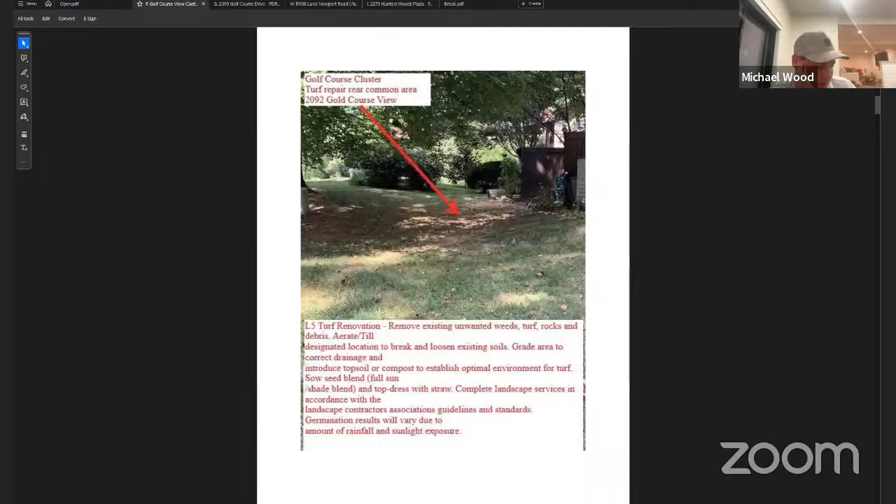Does anybody want to make a motion? I'll make a motion. I'd like to make a motion to dismiss this issue due to a lack of jurisdiction on the DRB's part. The landowner appears to have resolved the maintenance covenant violation by taking a course of action, an option provided by the covenants administration, restoring the site back to existing conditions rather than altering existing conditions. Therefore, that is not in the purview of the DRB.

There's a motion. Second. Brian with the second. Any further discussion on that? All right, all those in favor of the motion, say aye. Aye. Aye. Any against? Any abstentions? All right, motion passes 6-0.

All right, next appeal. Application G is the appellant here. Cam, welcome back.

Yes, on behalf of the Reston Association Board of Directors, we are appealing the prior decision that is on page 3 of the application. The panel on 611 disapproved the regrading in locations as indicated on submitted site plans, as it was not in the purview of the DRB, and requested RA staff to explore whether the project requires DRB approval or not. To my knowledge, and based on the indication on page, I believe it is page 29 of the application, and the drawing that was provided by the applicant, there are 2 specific elements that have been requested or currently exist. One would be the exposed downspout that goes to the edge of the property that expels onto the sidewalk cluster common area.

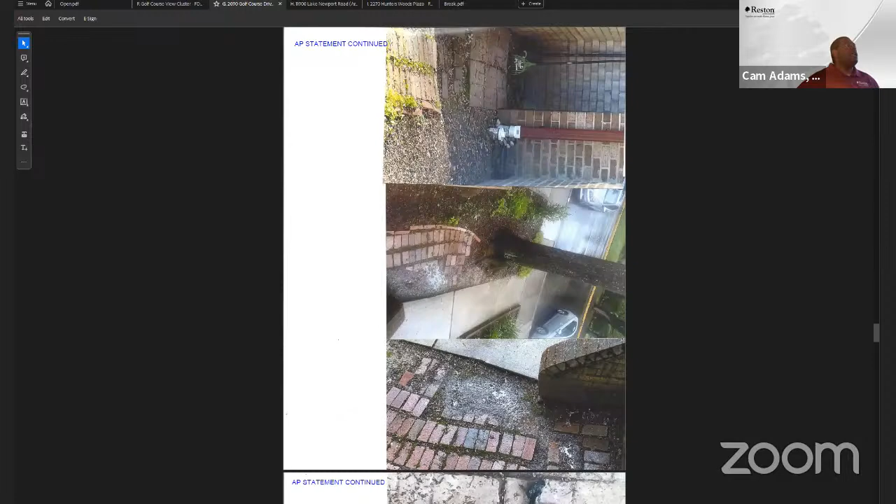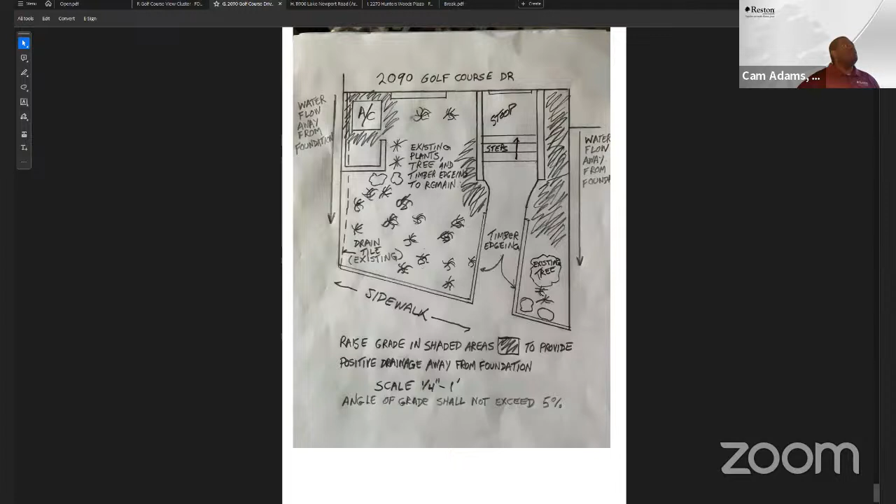If we could go to page 29 in the application, you can see it on the left-hand side facing 2088, I believe. It expels - it says drain tile existing. There is actually a downspout, corrugated extension from the property owner's gutter downspout, that extends to the sidewalk, as well as, if you could see, there are certain aspects of this that require or is being proposed to have stone installed to help with the regrading that has been suggested to address the foundation issues that the property owner is experiencing. And so those 2 elements are subject to the design review board's purview in terms of exterior modifications. So the Reston Association would request that the DRB accept the appeal.

Okay. Any questions for the appellant?

All right. So once again, John and I were on this panel, and we kind of made a similar decision as the previous application due to us feeling that there wasn't anything else. I was unaware that there was that - I mean it's labeled as existing, but basically I didn't know that was the pipe on the left was part of the complaint and the violation. So to me, that is new information, just for the record - we did not know about that. We were focused so fully on the right-hand side of the property, I didn't even know there was other stuff going on, to be honest.

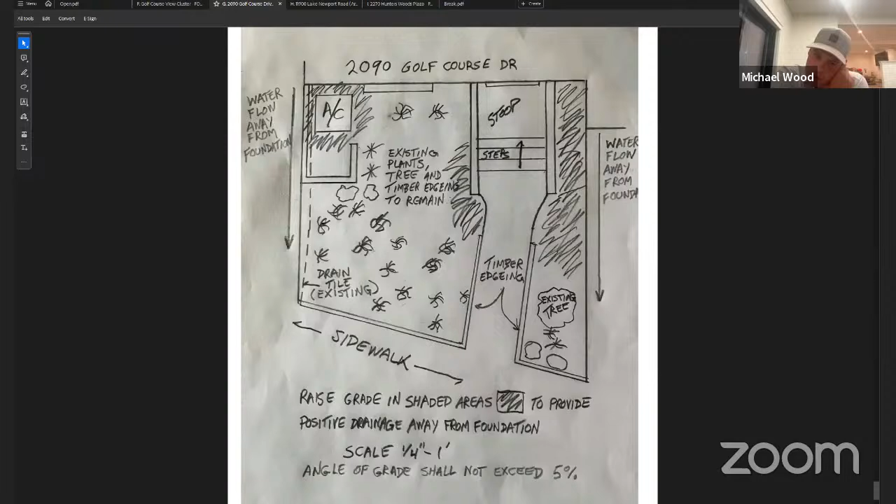Staff, do you have that picture of the black downspout on the left-hand side? That's the back one - you'd have to come out and take pictures now since the monkey grass has been added. And someone did come out and they said, oh yeah, this looks much better. I was like, yeah, thanks.

Sometimes with downspouts we allow short extensions that can be covered by vegetation, but if it's a long extension - I think the picture I saw showed it directing water right onto the sidewalk out front, not your sidewalk but the actual front sidewalk, which our guidelines don't allow. So staff, do we have that picture you showed us?

I can cut it shorter, that's not a problem, but then it is going to impact my other neighbor, Kirk, because of the way the land slopes downward, and I don't want to ruin his azaleas. That doesn't seem very kind.

And actually, I do find it interesting that the complaint is only against me. Yet if you walk the neighborhood, most neighbors have that. So that does make it a bit tricky.

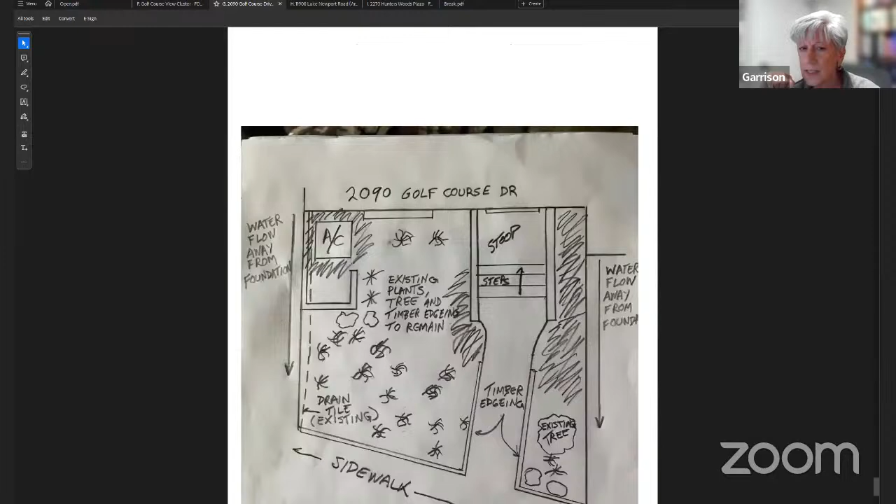Is there a reason that I'm missing that you can't disperse that water in your lot that's coming off that existing drain tile? Right now, I'm looking at page 29 of 29, staff. And it just seems that draining water onto a sidewalk is going to cause a problem, especially during the winter when it can get icy.

In all honesty, it's never been an issue because I'm also pretty particular about shoveling, and working in cardiology is just the way I work. But I've never had an issue with it. Really for me, this is about the right side where there is no piping at all.

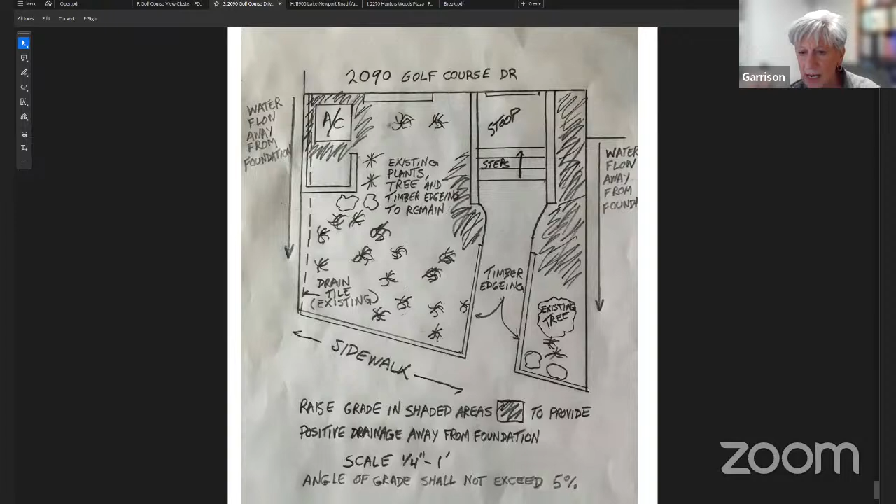Understood. So my question on the right side is what kind of stone - okay, now I'm going to ask Mike B to pop in because he's our PE - but stone is not impervious and it doesn't run things off. What it does is, depending on the size and grade of stone you're using, it just lets the water drop down to where the grade is faster.

So that's not going to help runoff. It's not really raising existing grade. Water takes the quickest route with gravity, and the joints between stones are the quickest route down.

In all honesty, we hadn't finalized a set type of stone. I want to be totally transparent, so nothing had been finalized as to a specific type of stone. And right now, there's not currently a water issue in that back corner. It's strictly an aesthetic issue, right?

It's an aesthetic issue, and there is a water issue. So at the end of the steps, behind the tree, it pools right there. Sorry that you guys don't have the picture I submitted to Barbara, but that shows there's a gap for the grading, and so it pools there. And that actually does freeze in wintertime because there's about that much of a difference. So trying to kind of clear that up so it's a bit better.

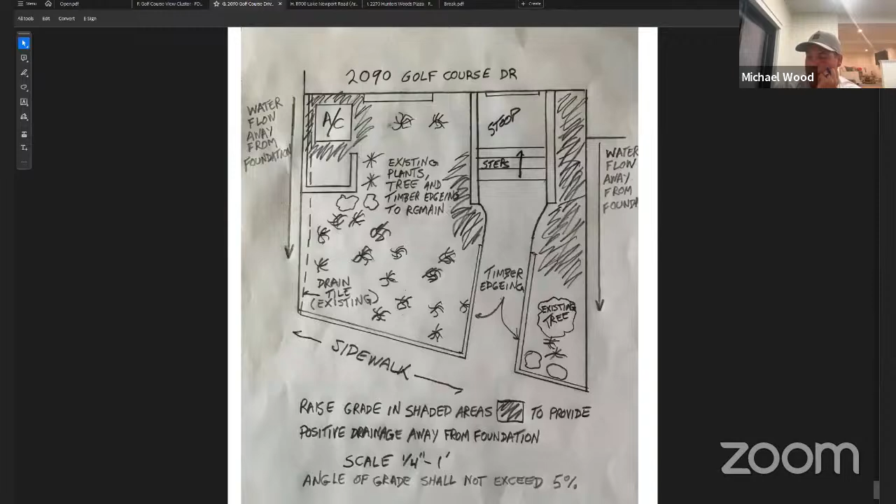So I want to pull out that brick and add some dirt and help make it look a little bit more attractive, because that's where it pools during the hard rains and stuff like that.

Absolutely. So without doing anything else and topping it with a stone material, Elena's absolutely right - it's just going to allow the water to run through it and it will go where it's going to go. So some manner of collection system would be prudent to collect it and get it somewhere else, if you don't want it to just pool there. It'll pool there until it overtops your sidewalk and runs where it's going to run.

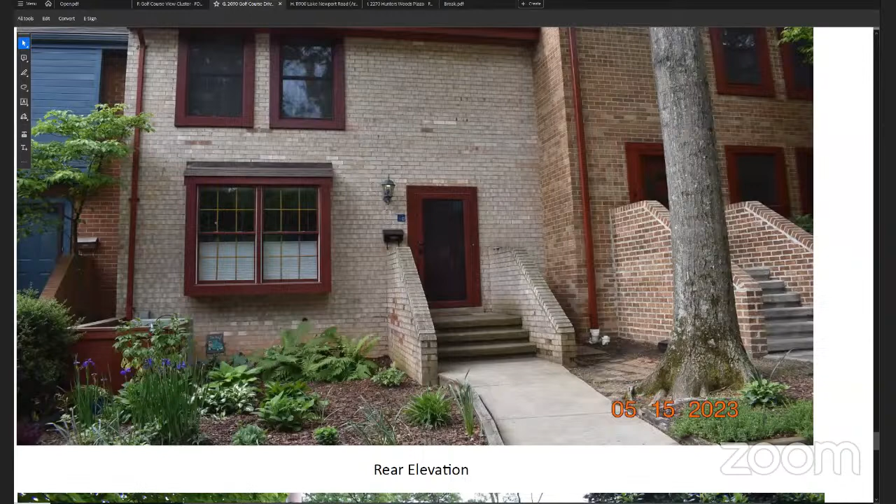Yeah, go ahead, Elena. No, I'm sorry, I was suggesting a yard drain or something like that, but I'm sure you're getting there. Yeah, I mean, similar to the French drain you had installed to combat the foundation water - just something to collect it and a pipe to effectively move it someplace else to allow it to dissipate rather than sit against your existing infrastructure there.

So that's the critical bit. To me, if she likes plants, I would even find a water-loving, shade-loving plant - put a bunch of ferns there. That is actually getting attractive plants that will thrive in that kind of space, because I like lots of plants.

That's gonna look... I know people like riverjack stone, but the reason riverjack stone is there is usually it's covering a pipe, or covering a dry well, or covering something that's actually collecting the water below and conveying it away. It's the filter media for the water to run through to that other collection system, right?

Correct. So that's one reason why we're bringing this up. So aesthetically, it definitely looks better than the brick, but it's just not necessarily going to fix any of your issues if you just put a layer of stone down, is basically what we're saying.

So, I guess the question for me is, does it need DRB approval if I'm trying to do something on the right side - that's what I'm talking about.

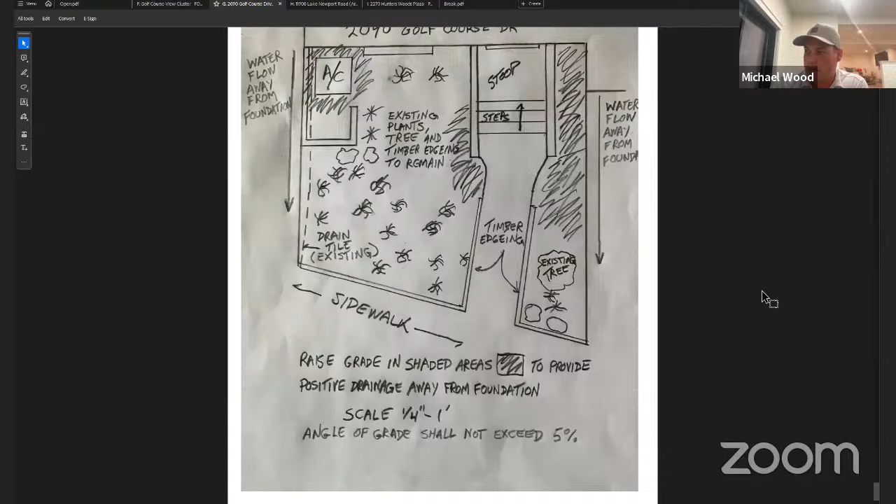So what I am thinking, and I'm not making a motion yet, but what I'm thinking is maybe, if we request just basically updating the plan that she already submitted - that drawing on page 29 - that basically clarifies a little bit better exactly if she does want to propose stone. I think it is a good option.

I just think it needs to have an actual point to it. So, it's gonna have a pipe that maybe goes under your sidewalk and then has a pop-up emitter in the middle of all those nice plants there and gives them water - just as a thought, could be an idea.

There could be a way to just maybe plant that right side and just maybe put some stone in the back corner.

So I think you guys need more information. I'm thinking that we just need a little bit more information and a little bit better existing information, and you may show us that the drain tiles have been adequately covered - she says send us updated pictures, and that might be adequate.

But I would say if it's still going directly on the sidewalk, our guidelines do not like that, because, worst case, even if you're out there shoveling, whatever, there's small water drips that just come through there over time. That thing probably isn't even really draining that well if it's horizontal.

It actually is short of the sidewalk, so it actually falls into the thing. And so you might have a better way to show us the existing situation a little better. Okay, sure, that's fine.

That makes sense - what I would say is I'm going to make a motion to defer the application to allow the applicant to submit updated information on some of the existing drain tile on the left side, as well as provide an updated material or plant matter or plan of action on the right-hand side that is clear to us as a board, with more information.

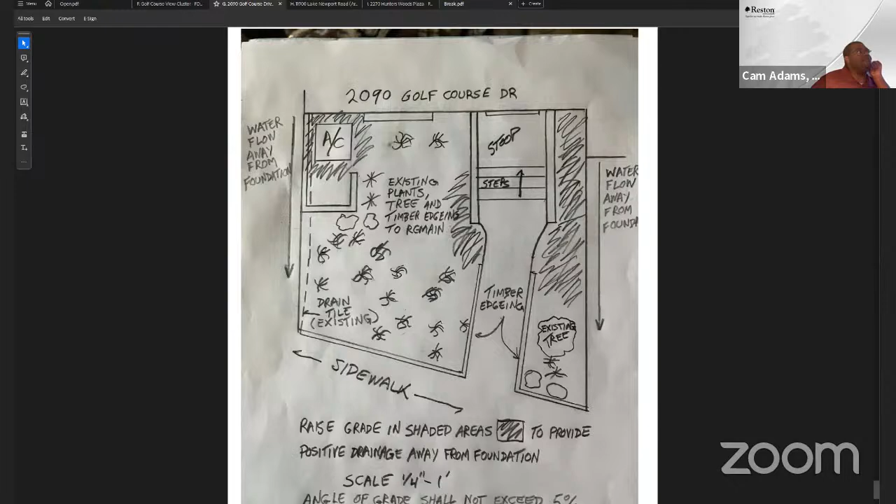Say 60 days to submit. Not a problem. Are you okay with that, Brian? Yes. Seconded? Yes. All right, is everyone else who voted okay with that? Say aye. Aye. Any against? All right, timeline of 60 days added.

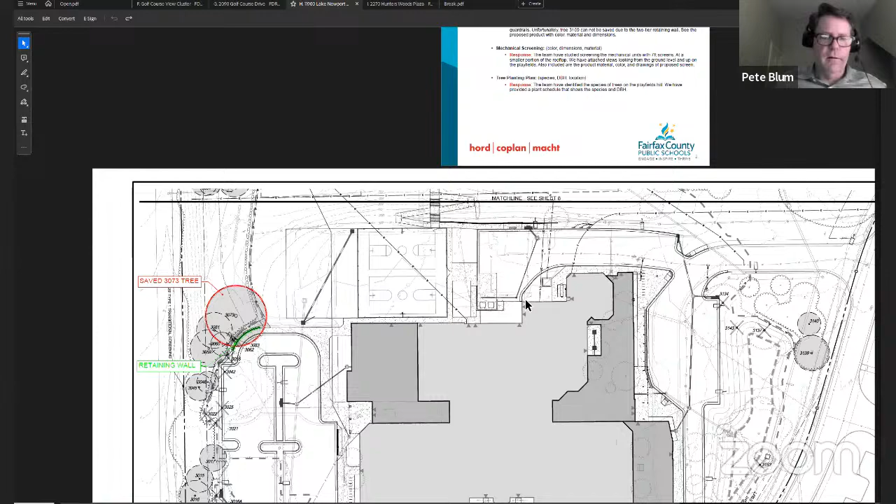Okay, you could pause right there. The tree in the upper left-hand corner of the sheet, as before, we're able to keep, by virtue of a small retaining wall that's under 2 feet. Previously, we had thought we could save both trees 3170 and 3169. We had been asked to look at saving tree 3170, and it turns out we could not get a small enough retaining wall that would work for that. Our retaining wall was going to be too high. So if you go to the next slide, please.

So what we're proposing adjacent to the children's play area, or the outdoor classroom, is that we'll still be able to save tree number 3170, the specimen tree people have asked us to save. But we'll have to do it by splitting the retaining wall into 2 steps. By doing that, we're not able to save the smaller tree, which had kind of been a bonus. For the 2 steps, we're proposing to use this block wall system. It's curved, a semicircular curved wall. We're proposing to make it out of Nicolock, which is a brand name, but it basically looks like stone. It lays up a little bit like block. The color we're proposing is York brown.

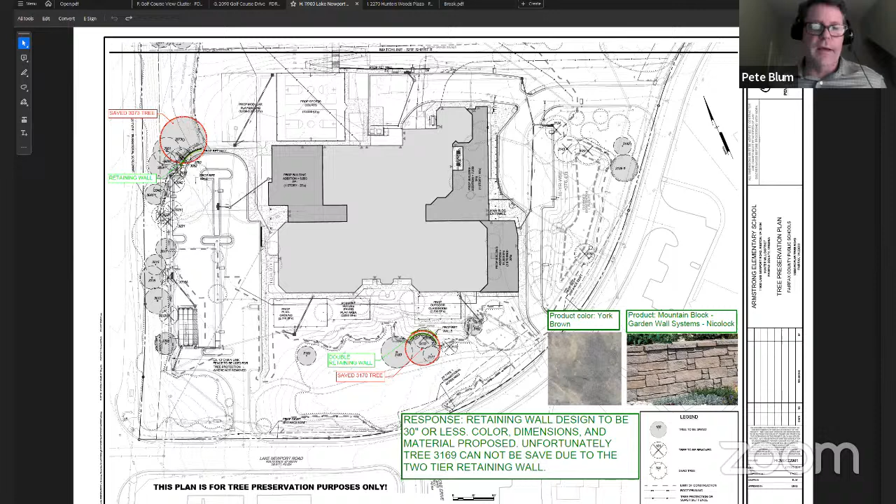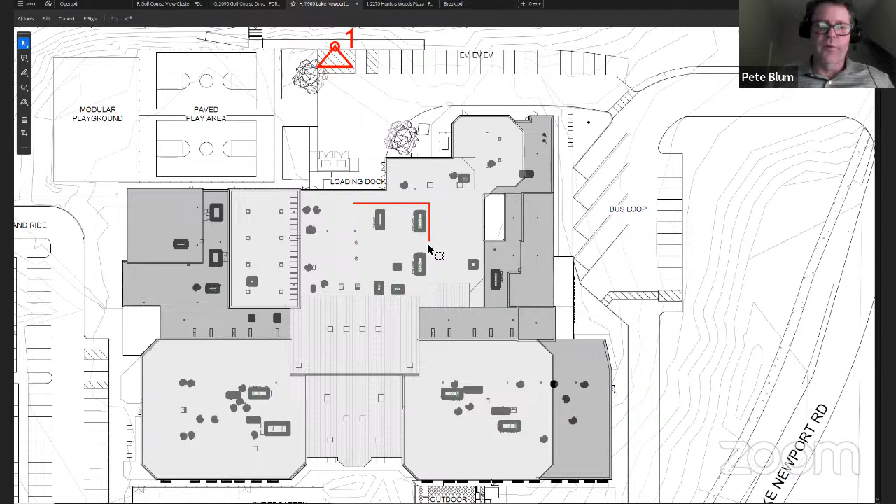All right, if there are no more questions on this, I would go to the second item you asked us to look at, which is the next sheet. Okay, on this sheet you can see, if you zoom into the middle of the sheet, the roof plan of the building, there's a big red L. That is the extent of the area that, after our last meeting, we agreed to develop as a shielded area behind a louvered screen. So we've done the work to do that, and we have some views to support it. So if you could zoom back out, please.

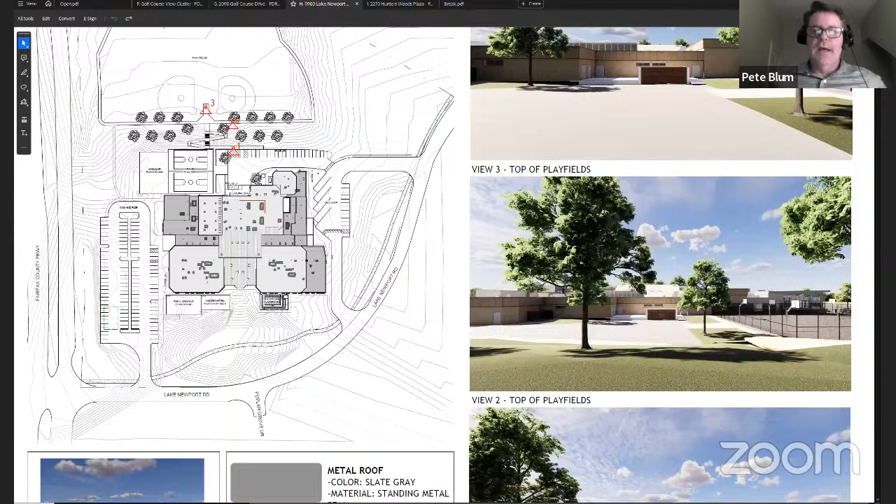View 3, at the very top of your screen, you see there that the louver effectively screens. There are 3 mechanical units in that vicinity, and you can see that they're quite effective. The louvers are 7 feet high. There's a gap at the base of them so that snow loads and debris don't accumulate there. And then there are weather louvers that you can't see through, but the air can move through.

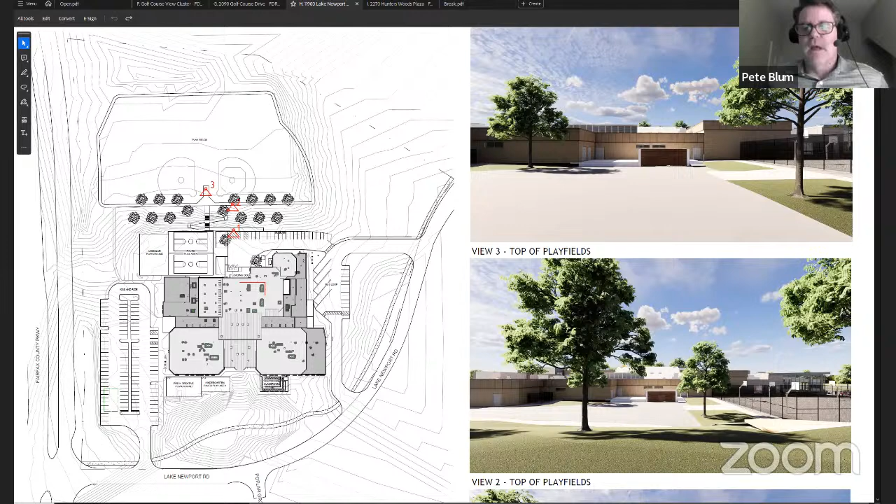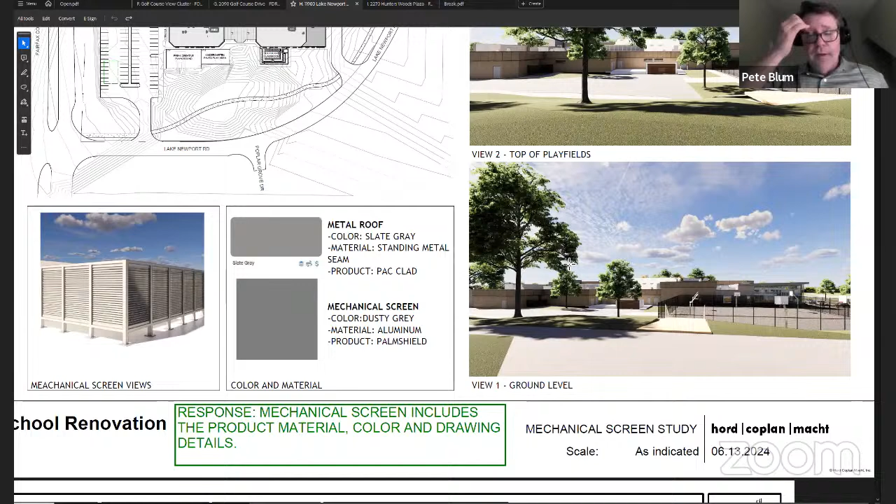If you look at the middle view, this is from further up on the play fields. You can see how the louvers retain their effectiveness, and with the maturity of the trees over time, we think you'll see less and less of the roofscape of the building. The top image is fully on top of the hill, right up between where the backstops are going to be. We really think by the time the trees grow in and you have the mechanical louver in place, you're going to have a very shielded screen view.

The product we're looking at is Palmshield. We're proposing it in a gray called dusty gray, and the gray swatch right above it, called the metal roof, is called slate gray, by a different manufacturer, PacClad. Palmshield - this is the closest match we could get. We're trying to have them kind of blend into each other.

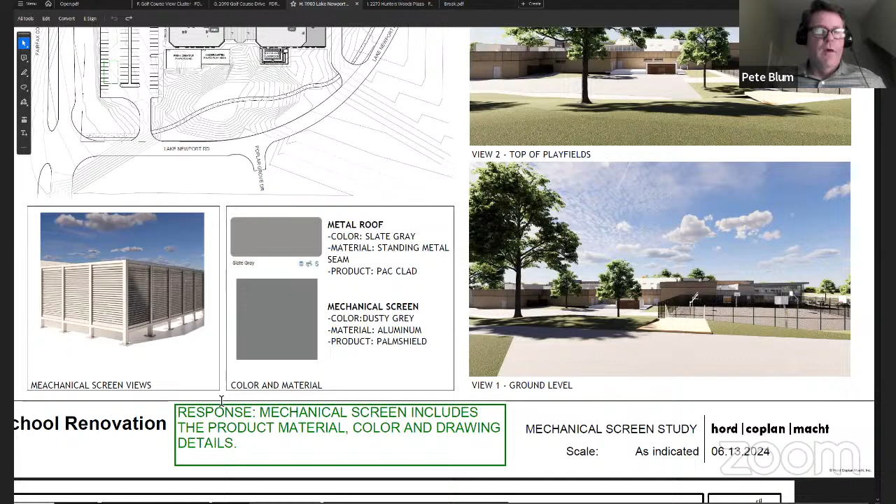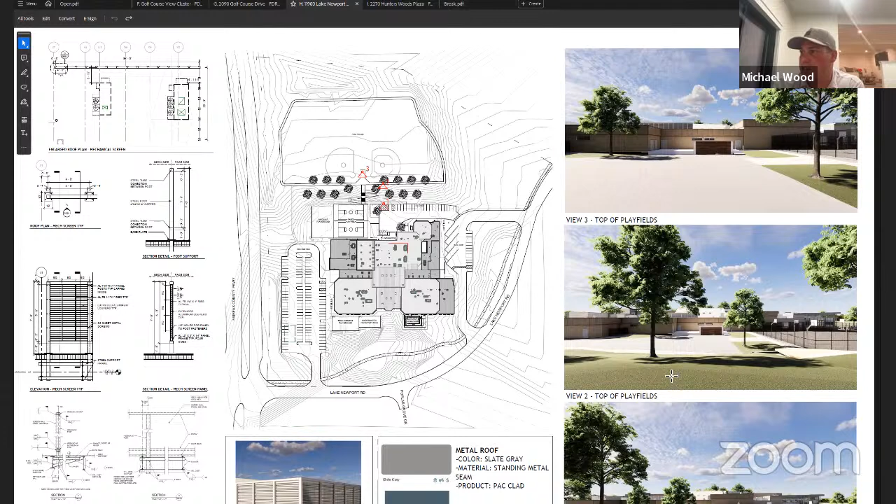No, I think you're good. I think that leads into the kind of views you were showing, which leads into those trees that you were presenting. If presenting, the next slide, if you'd please move forward one.

This is a view of the site, so big it's split into two plans. The top plan, the northernmost plan, shows really effectively all the playing fields that are going to be restored with new backstops, and then there's an asphalt pathway that's being built around the fields, which will run parallel to the south edge of the softball fields. On either side of that pathway, we have elected to plant 15 trees to help green the site and to further isolate the views from the playing fields of the roof of the building.

At our last meeting, I think Emily had asked us to be more specific about the actual kinds of trees that we're planting. If you would go to the next slide, please.

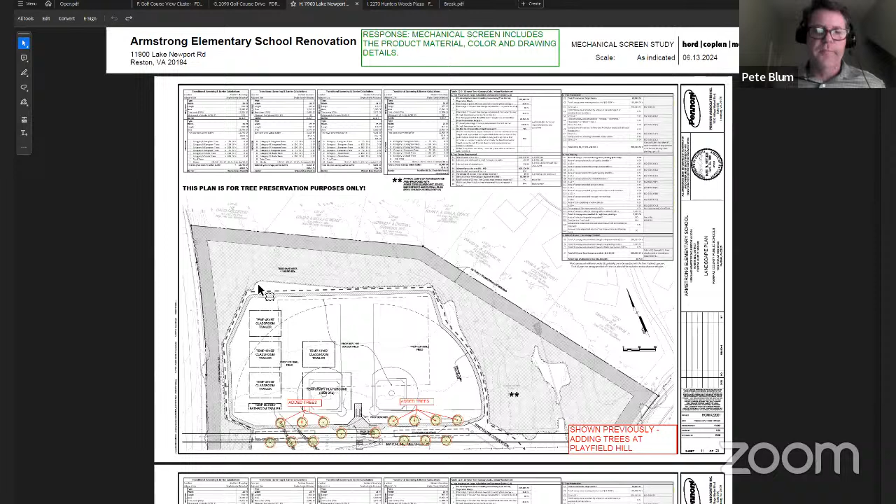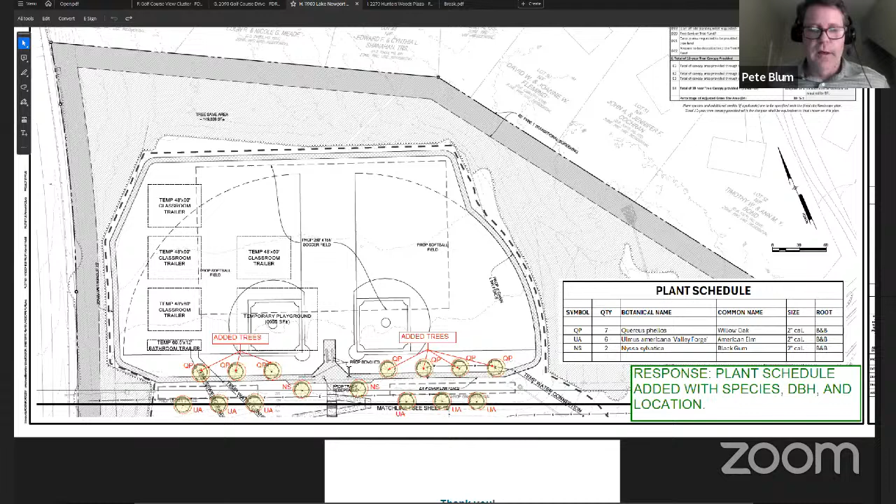On this slide, what you see is that the added trees are all called out with different letters in front of them. Those with the QP in front of them are willow oaks, so those are mostly on the north side of the asphalt walk. Those on the south side, flanking the central ramp, are denoted with UA, which is for American elm. And then the two flanking the central space are the black gum. All the trees are proposed to be 2-inch caliper.

We picked a variety of trees, so there wasn't a kind of monoculture, but also we picked out the black gum to try and help form a space around that intersection between the backstops, a special kind of point of arrival there. Whereas the other trees just follow the hillside on either flank. Are there any questions about this?

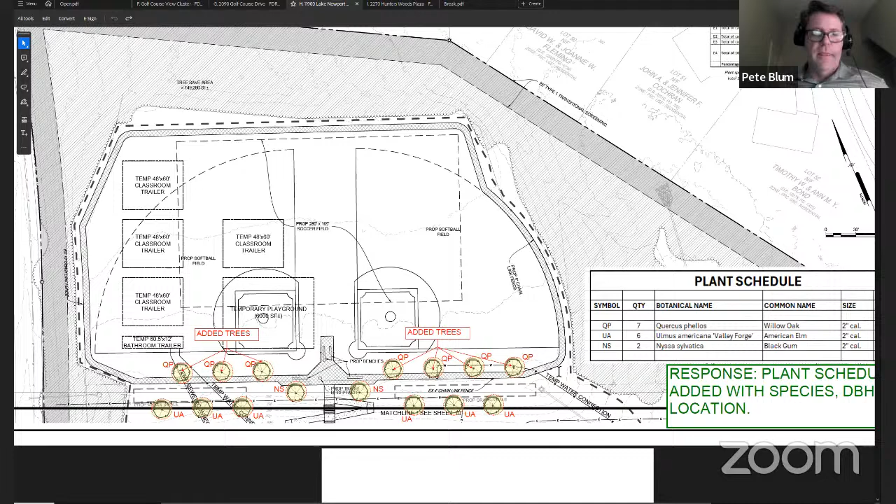I think it's all pretty clear, Pete. Thank you for coming back with the information, very helpful. Let me go around the room, just double check if anyone has any questions, and then we'll see if there's a motion, okay?

Elena, do you have any questions? No, I do not. Thank you. Samantha? No, I do not. John? No, he seems to have addressed all of the issues we had asked him to do last time we saw this. Mike? Negative, sir. Brian? No questions.

Yeah, I think it's great. Thank you for coming back. I appreciate the extra information. The one tree that we are losing, I think actually having the tiered retaining walls will be kind of nice. I think the kids will actually maybe even use it as a little outdoor amphitheater-like thing, kind of a classroom under the tree there, which is kind of cool. So I think the plan is great. I think we've worked together to get to a great point.

The added trees look well. You've done a lot of work, so you always have a thorough application coming to us. So I'm going to make a motion to approve the application as submitted. Second. There's a motion and a second. Any further discussion on that?

All right, all those in favor, say aye. Aye. Any against? Any abstentions? All right, motion passes 6-0.

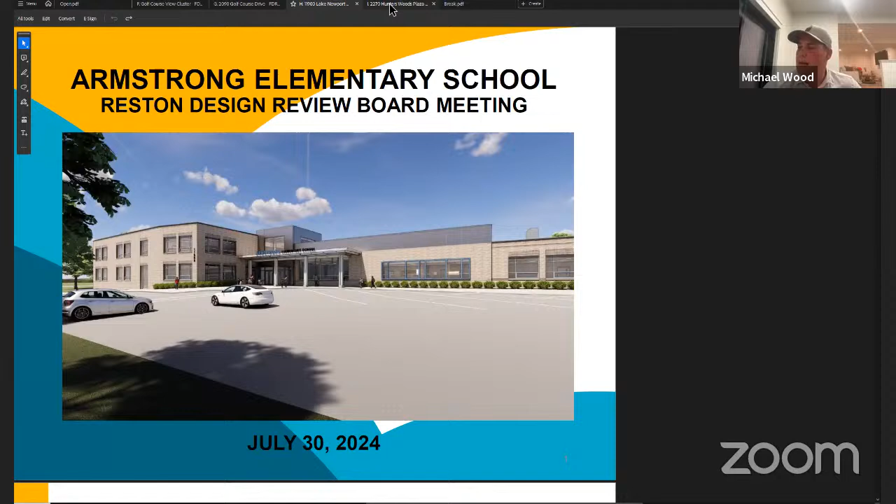All right, moving on to, I think it's our last application. Application I, it's for the 2270 Hunters Woods Plaza. It's going from a Burger King to a McDonald's, which feels like it's trading against each other, but yeah, the Burger King's been closed for a while.

Is the applicant here? Yes, we have several members that will be presenting. I have unmuted Tammy, you're unmuted, or Michael, you're unmuted. I don't see Ian. Ian, if you are here, could you raise your hand. Let's see. Clay, will you be presenting on behalf of the applicant? Michael Juriga will be presenting mainly. Okay, Michael, you are unmuted.

So, as previously stated, this is a previous Burger King that's being updated to a McDonald's. If you go ahead and go to the existing photos, for the most part, we are proposing to keep most of the exterior materials in place, with a few things that we are taking off. For the most part, the EIFS and the masonry will remain in place. However, the extent for the EIFS will be to put in a new system, but it will be in the same location as the EIFS was previously.

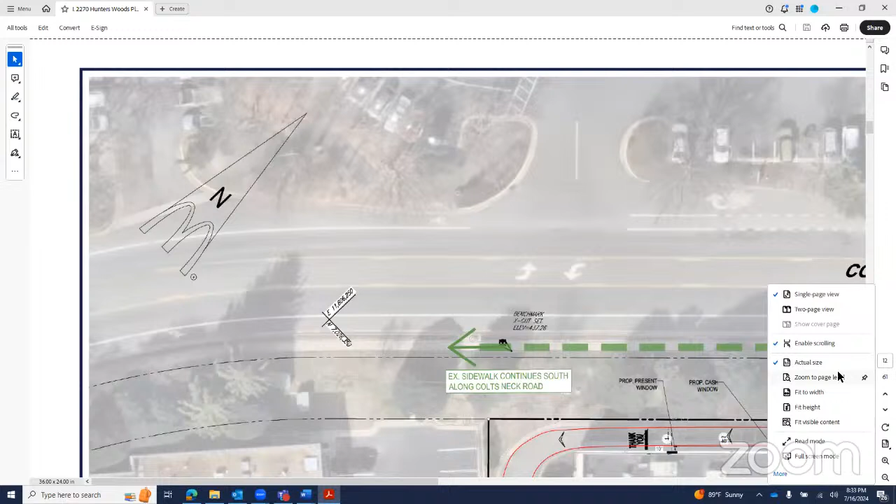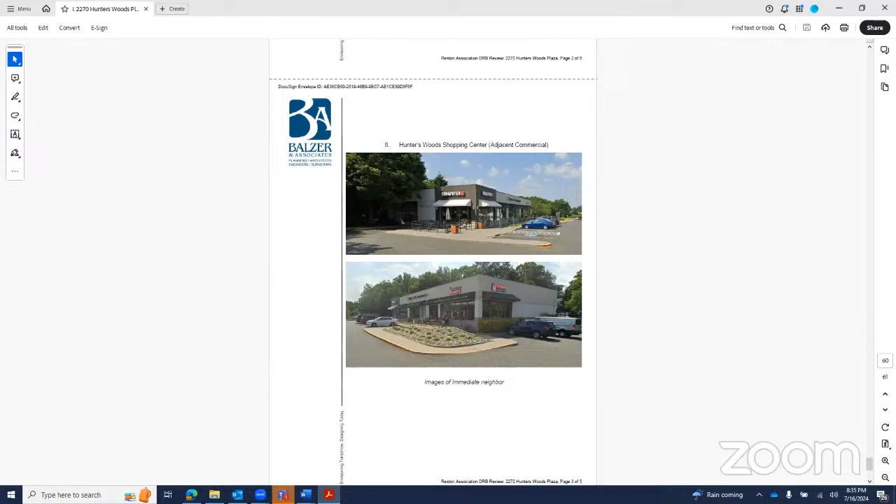If you go to, I believe it is the third page, the western corner at drive-through and trash enclosure. This is the western corner drive-through from Colts, and then the southern corner. Gotcha, so there should be a page after that, so it should be the next one. Okay. So essentially, the mansard roof that's currently in place is too low over the drive-through, so there is evidence of existing damage to that mansard. And so part of our proposal is to remove the mansard roof and have a complete EIFS face.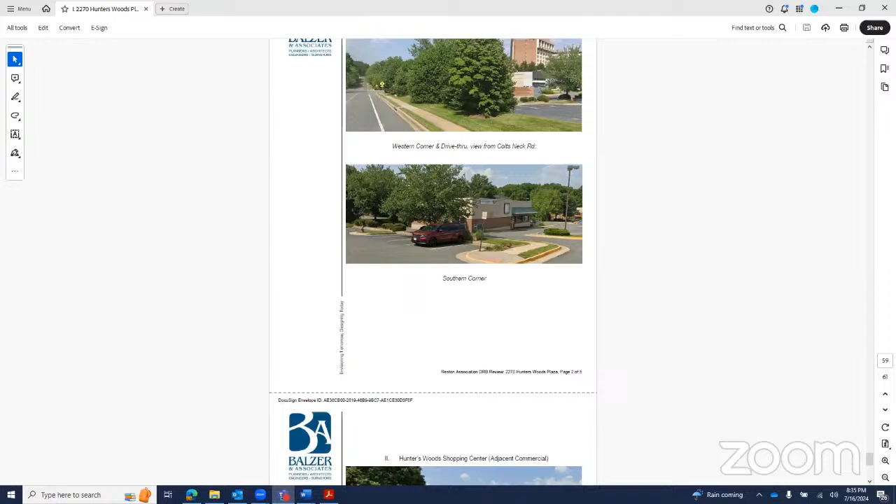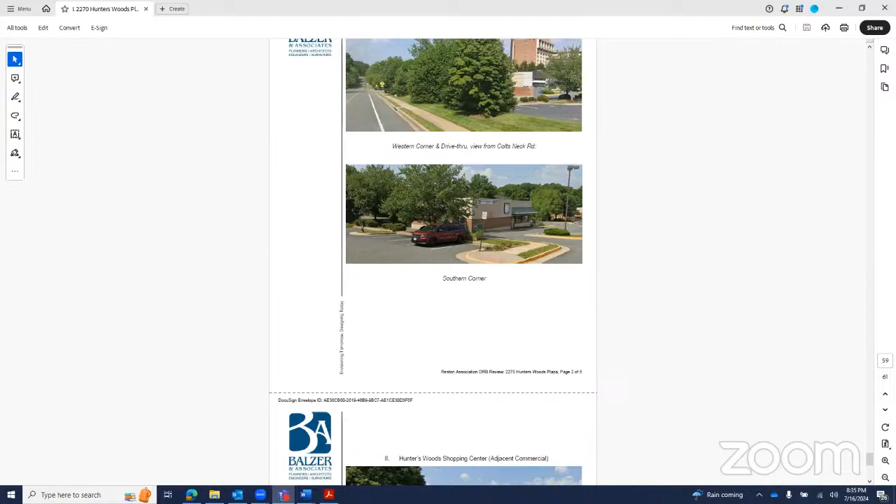For the most part, for the color scheme in terms of what we are pulling from, we looked at the neighbors. So if you scroll to the neighboring buildings, that'd be the Hunter's Woods Shopping Center and the immediate neighbor, we really pulled from those existing color schemes of the grays and the whites, with some of that paneling details.

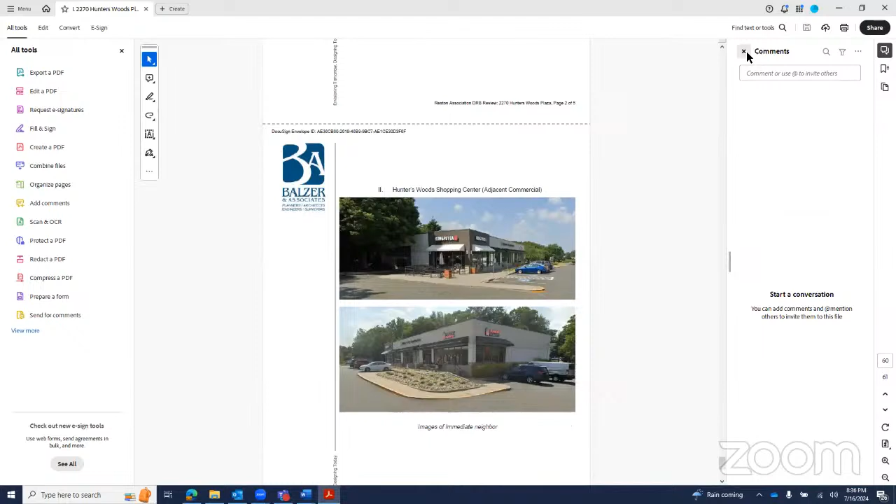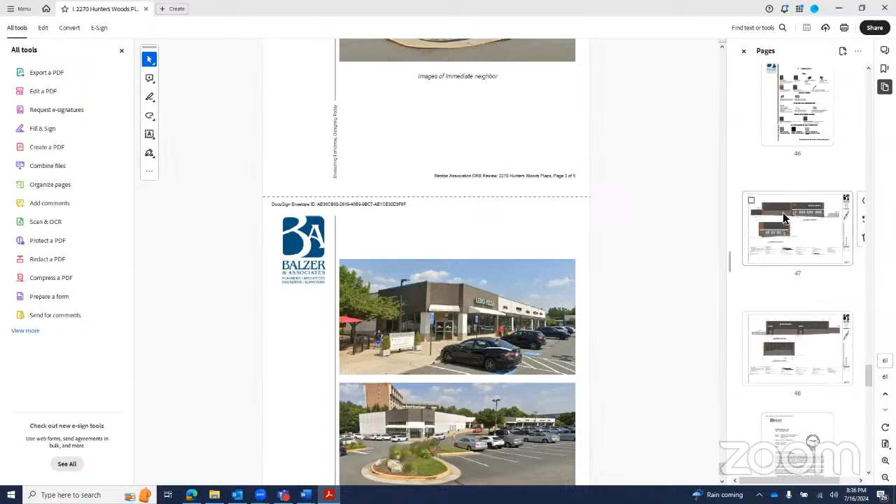So if you keep scrolling through, we should have some pictures or some renderings of our elevations. There we go. So our elevations, we are keeping pretty much most of the existing elements. As previously stated, we are removing the mansard and replacing it with a white aluminum canopy, which matches other white canopies found throughout the shopping center. As for any plan changes to the building, if you go ahead and scroll to, I believe it's the demolition sheet.

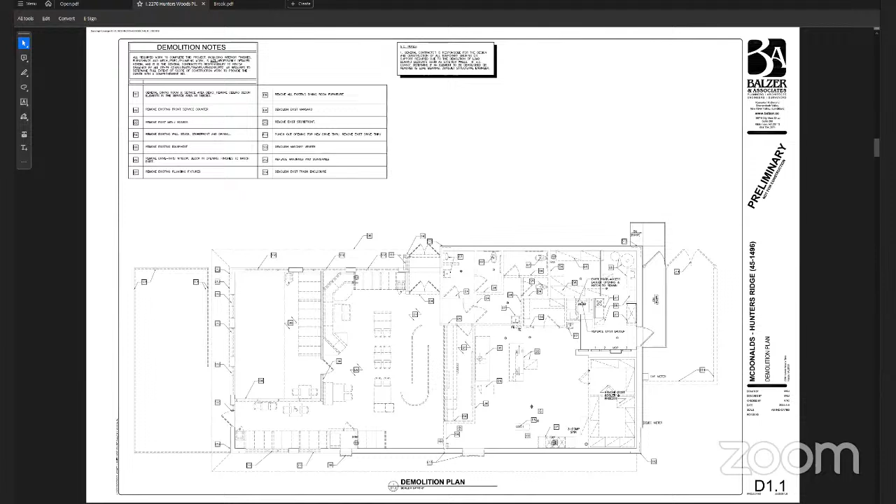If you go to the architectural plan, the next page, you can see the interior will be updated to a modern fast food restaurant. The exterior guardrails for the existing patio are to remain in place and be repaired and repainted. The handrails currently on site are not ADA compliant, so we are proposing to add new ADA compliant handrails and extensions, which will be painted to match the aluminum storefront.

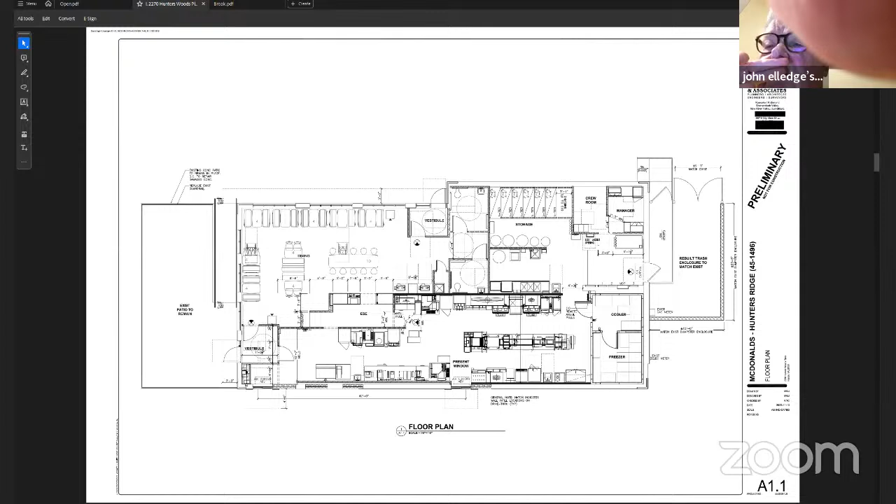So if you go back to those main elevations, we are keeping the existing concrete block and brick, and we are proposing to paint that a neutral gray to match the neighbors. That was a gray tone color-matched when we were on site, using a dark gray for the EIFS called RAL 7022. At the corners, for some added interest, we are adding an aluminum batten system as well as the typical McDonald's word mark and logo signage.

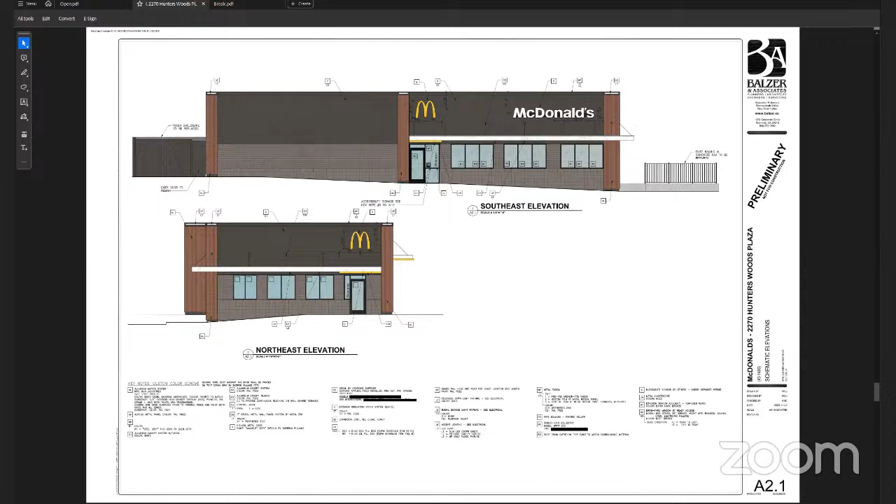In addition to these exterior renovations and updates, there are also proposed improvements to the existing drive-through and site conditions, which I think we have the civil engineer on this call as well, who can speak to that.

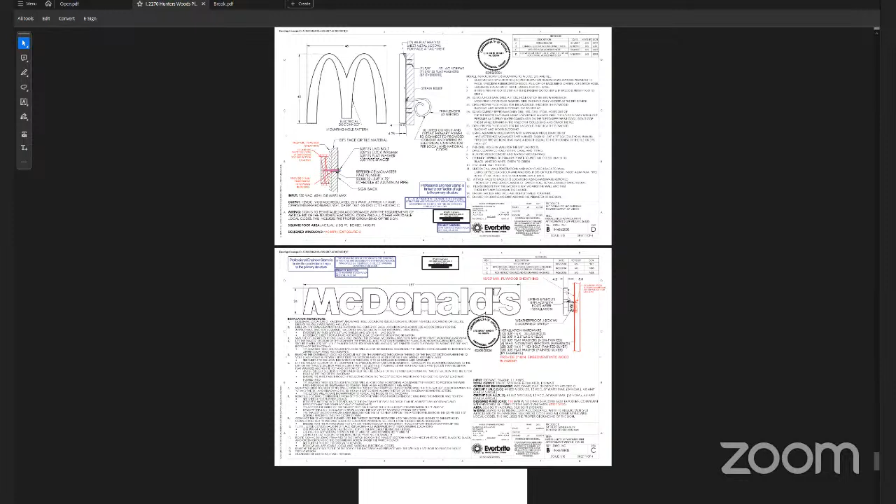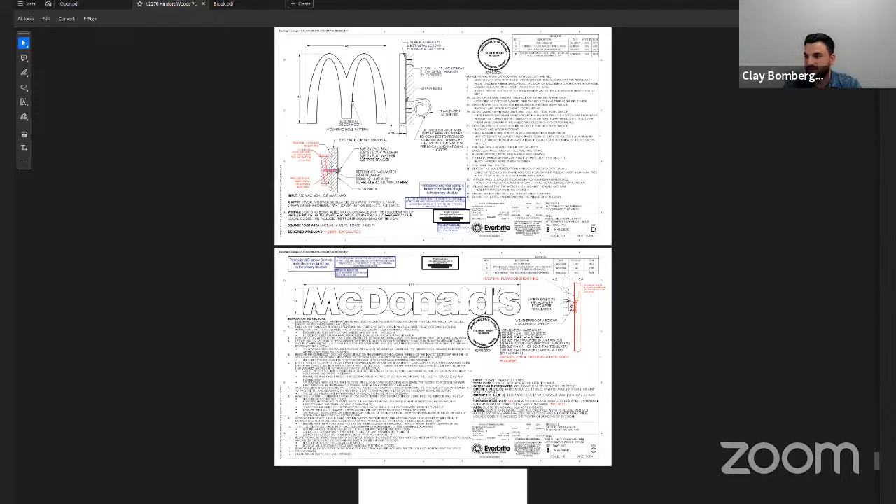But yeah, like Michael said, the majority of the improvements here—if you can go to page 12, that would help me talk through it—he's already covered most of what we'd consider the civil scope of the work. The patio, handrails and guardrails to be repaired, the trash enclosure to be patched and repaired. The existing Burger King center will be largely left as is, just from a site perspective. Obviously the architectural will be modified, but the other item Michael alluded to is the ADA improvements we'll be making to the site. We'll be improving the ADA condition to make sure it remains compliant with regulations and requirements.

Most of the disturbance will be made to the sidewalk adjacent to the building. We'll be moving the ADA spaces from those angled spaces shown on the page south to a flatter area on the site, the parking lot to the east of the building. There, it's much closer to the sidewalk as well, so we won't need to be directing pedestrians across the drive aisle.

There are very minor curb changes needed to fit the required menu boards in the drive-through. You can see two small areas of LOD, limits of disturbance, on the eastern side of that parking lot I was referring to. We are modifying curbs by less than a couple feet to fit the menu boards, and making sure we maintain the required minimum width for parking stalls—I believe we're probably at 9 feet wide there.

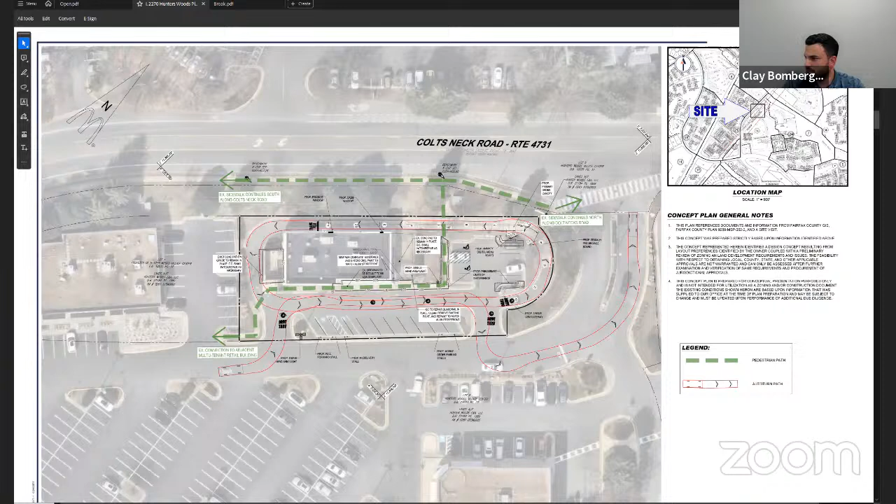Do you know how many poles you're adding? It looks like there's going to be a 3-headed light fixture at the entrance - a prop triple head area light - and one other light pole near the center, a prop single head area light. I believe that was all that was going to be added, and there's a separate lighting section in the package submitted with more information.

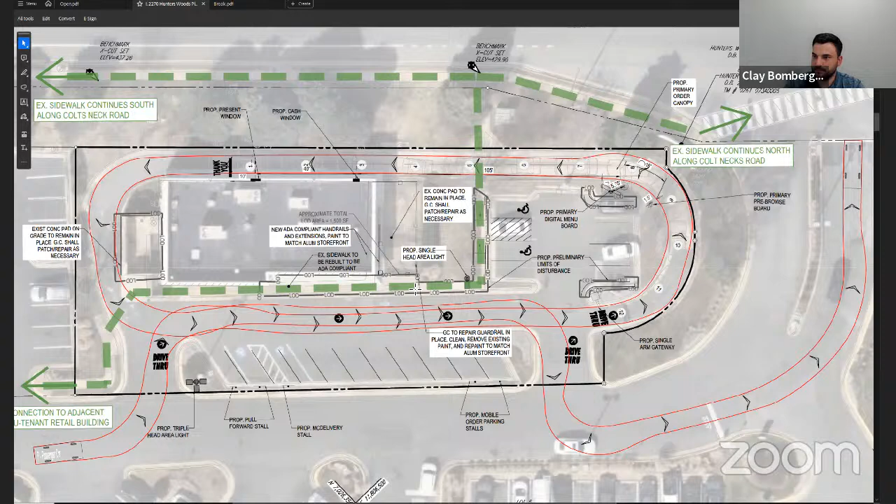We obviously modeled the existing lights to remain. The one on top of that eastern parking lot, shown in bold black lines, is an existing one that will remain and isn't going to be changed.

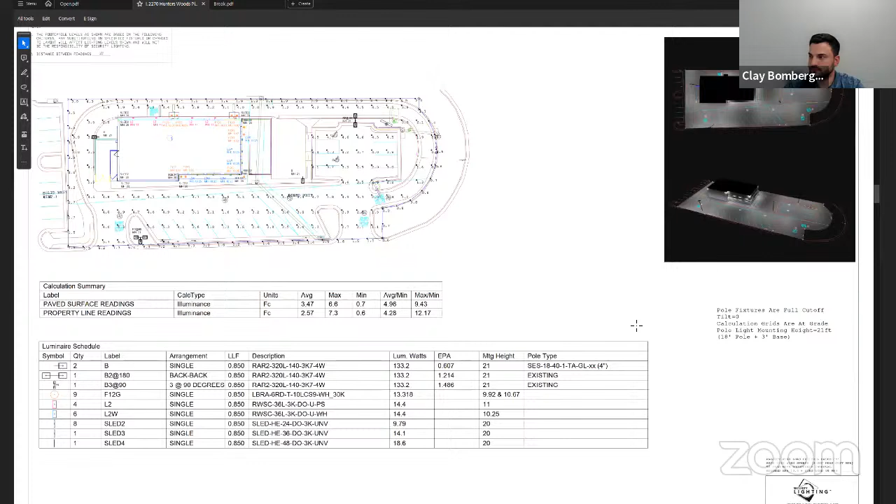It looks like it's two new lights - one over by the patio seating area, and one at the back of the drive-through by the dumpster. The other two are actually already there.

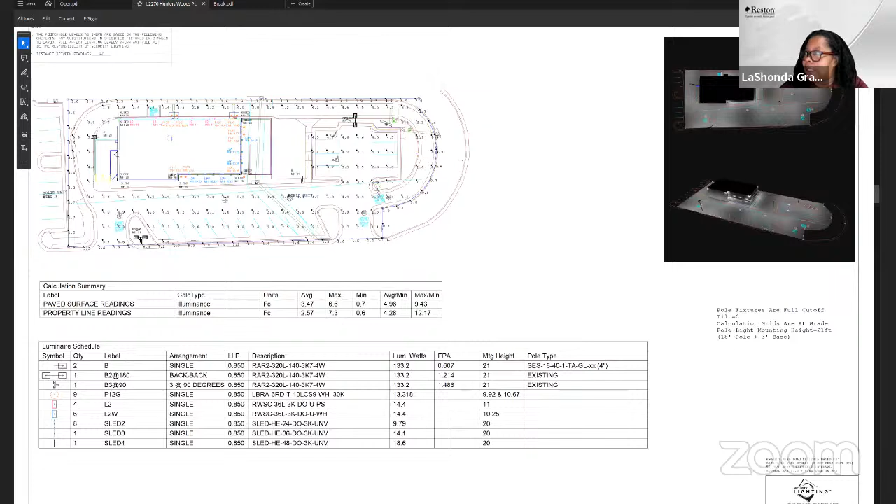All right, you guys have anything else to present? Is there somebody presenting signage? I don't have anyone listed. Michael, are you going to present the signage? Ken Paget submitted the packet, but he's not on the call. Wondering if either...

So typically for the signage, that's like a proprietary item, so that's not something that architecturally we really do much work on beyond showing it on the elevations. Was there a specific question on what you see on our rendered elevations?

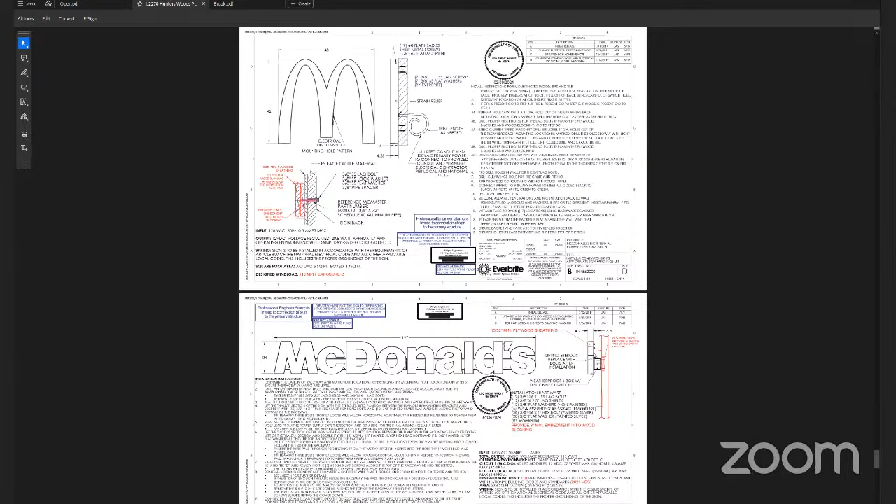I had a couple questions. Right now you guys are proposing a sign on Colts Neck Road, which currently has no sign, and there's a huge vegetation presence, so I don't understand the point of that sign. Burger King had it kind of above where the trash enclosure was, and above the patio situation, and they had their nomenclature on the big sign to the left of the front door. So I was a little confused about the sign along Colts Neck Road and whether it's really necessary.

That was one question I had. I don't know if anyone else felt about that as well. I also always thought the one above the Burger King trash enclosure was kind of funny - I felt like it wasn't really necessary. So I just wasn't sure if there was somebody here that could talk about that, but it sounds like there's not.

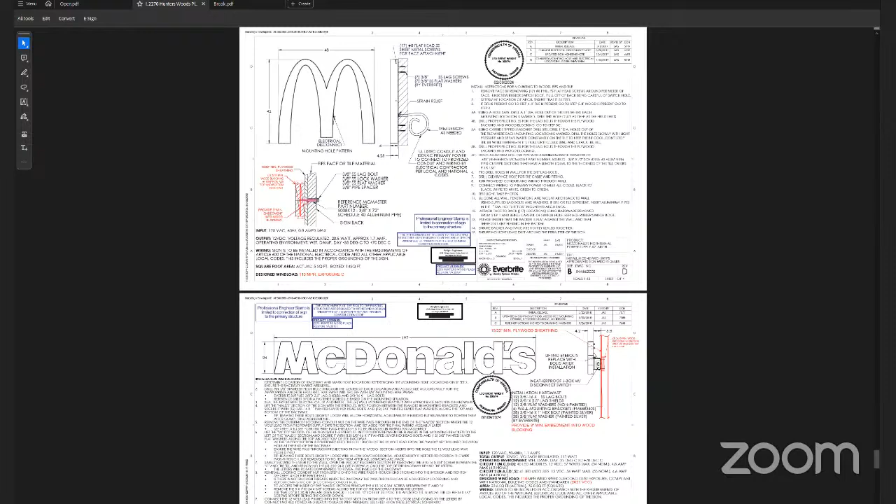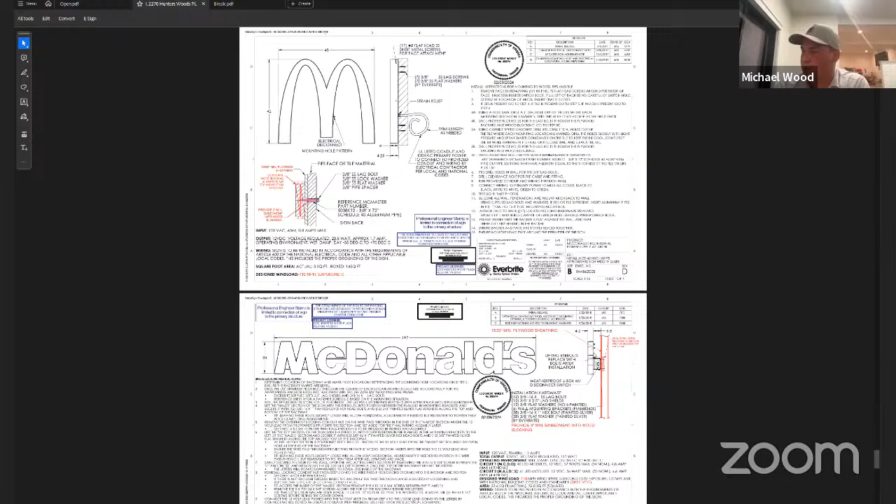That's fine, we'll review what we have, and if there are any questions we can put it in our motion. So the signage would be removed over the trash enclosure, so there wouldn't be anything there. It looks like you're putting it over the front door area and then one along the drive-through, with none on either short elevation. There's just one M sign above a side door off the patio, right? Yeah, that's correct.

Let's go around the room and see if there's any questions. Or is there an affected party, staff? There is an affected party. Are they here to speak? They are not here - I couldn't identify them, just to make sure.

Mary Kimberly, if you are present, please raise your hand. I wasn't able to identify her, and there are no hands raised. Okay.

Cool, let me grab something here real quick. So we'll go around the room and see if anyone has any questions, then we'll go from there. Elena, do you have any questions? I do not, thank you. Samantha, do you have any questions? I do not, thank you.

Real quick, Margaret, are you raising your hand? I know you're the board rep, do you have a comment, affected partyness? Can you guys unmute her real quick, Steph? Yes, she's unmuted.

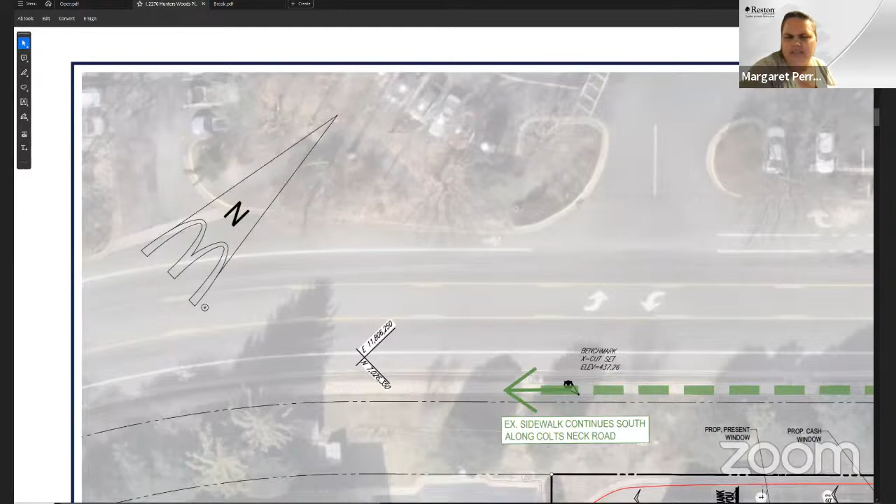Michael, this is more just a question for you guys, since I don't participate in general. But I just want to make sure that when you guys are looking at this, coming around the corner around that trash bin has always been treacherous, and I want to make sure you're really taking a close look at that. Okay, thank you, thank you.

John, did you have any questions? No. Mike? Negative, sir, thank you. Brian? No questions. I don't have any questions right now. Well, I guess I do have a question - so right now you guys are proposing to paint all that existing masonry, correct?

That's correct. Does the new models not have any? I guess you guys have a select material palette that you typically work with. That's correct. Right now, I guess the new theme, from what I can tell, is you have those battens, EIFS on even new ones, and it looks like there might be a siding, almost like a lap siding. From a quick Googling of it, there are some other materials you can put on the property. Is that accurate? That's accurate.

I'm wondering if the facades are just a little bit too, I don't know if they need a little bit more breaking up. Mainly that main facade is really the only thing I'm struggling with a little bit. Obviously you're just painting what was there, but unfortunately what was there was not always the most attractive building, so I'm trying to help elevate it a little bit. That's just a comment for the board to think about as we go around and have some further discussion.

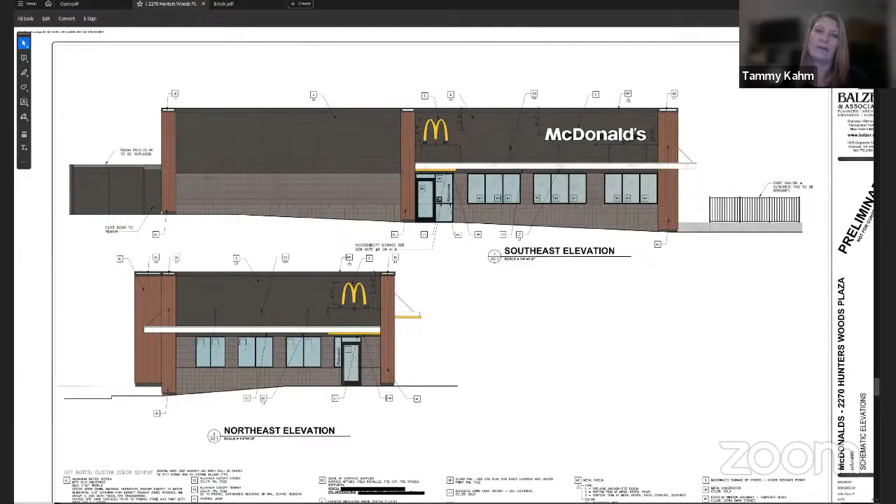Is there a way to give it a little different treatment, maybe on that wall, maybe just at the parapet, even if we still have a section of EIFS and then a section of board on board or siding, or maybe use a Hardie board finish like on some buildings, probably the same color, but it would give it some texture. I'm just thinking of something potentially.

It looks like you guys are modifying the window configuration a little bit too, is that accurate, or am I wrong? No, the windows will be in the same place, we're just putting in a new aluminum storefront window. You're going from a 4-panel system to a 3-panel system on the front facade, it looks like. Correct, to make the windows feel more open as opposed to closed in.

I think that change is successful. I also like the grouping of 3 versus the grouping of 4, I think that is successful. I think getting rid of the mansard is a no-brainer, you're going to modernize the structure, so I think all of that is good. There's just, I don't know, I hate painting masonry because then it needs to continually be painted.

No one can do it really that well, especially with that split face block or whatever that is existing on there. I'm just hesitant from that standpoint. I know you guys are trying to make it all cohesive, but it does look like you still have a brick texture as part of your new brand as well. Am I right that it's an unpainted brick? Is that accurate?

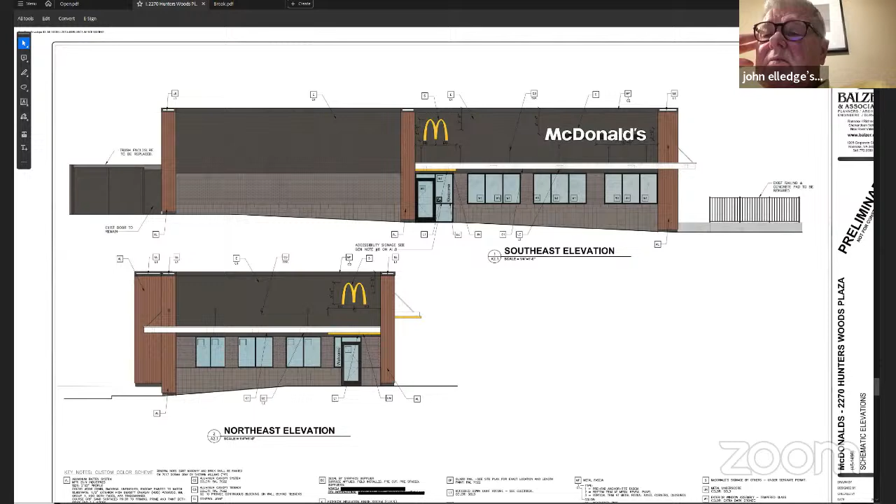That's correct. Although I think it's Glen-Gery brick. Let me see, I'm trying to remember the name off the top of my head, but it's a Glen-Gery brick. I'm just trying to think about ways to break up, since we already have that banding happening. Does it make sense to paint, as much as I hate it, the bottom portion that's the CMU block size, the modular size down there, but leave the brick? I don't know if that would help the situation.

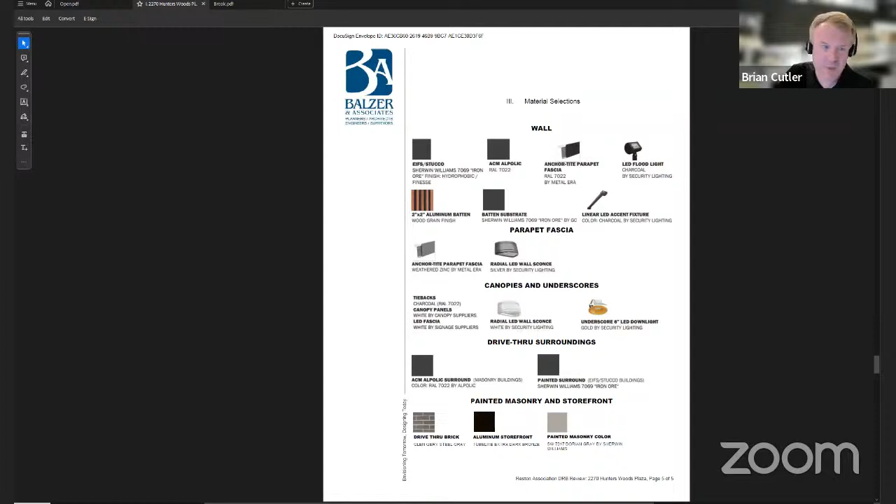Or maybe, Michael, do you mind if I? Yeah, go for it, Brian. My reaction ties into yours, where my first read on it is a nice contemporary look, but I'm worried it's a little bit too dark. So part of me is wondering, instead of leaving the brick, which is like a red brick or whatever may not fit, is it possible to leave the concrete block base unpainted?

I don't know the exact color of that, I'm just looking on Google Street View or whatever. I don't know if it would fit with the palette, but the read I'm getting is just how dark it is. I see what you're saying about trying to tie into the existing shopping center, and they use some of that dark siding at the corners as a highlight element. But predominantly it is pretty light, so I'm worried we need to bring this back just a little bit.

To add some lighter elements, or to Michael's point, I almost wonder, could we use more of the wood grain, the aluminum batten system? Could that help bring in a little bit more warmth to the overall palette? Is there more opportunity to use that?

Yeah, we could, I was thinking the same thing, because it's a lot of horizontal in this thing, so we could put some more vertical elements. And if this was the rear facade, I wouldn't really care, but it's the main facade that you see of the building from the shopping center. So I do like maybe adding some more of that wood, or the fake wood, aluminum wood, whatever we want to call it.

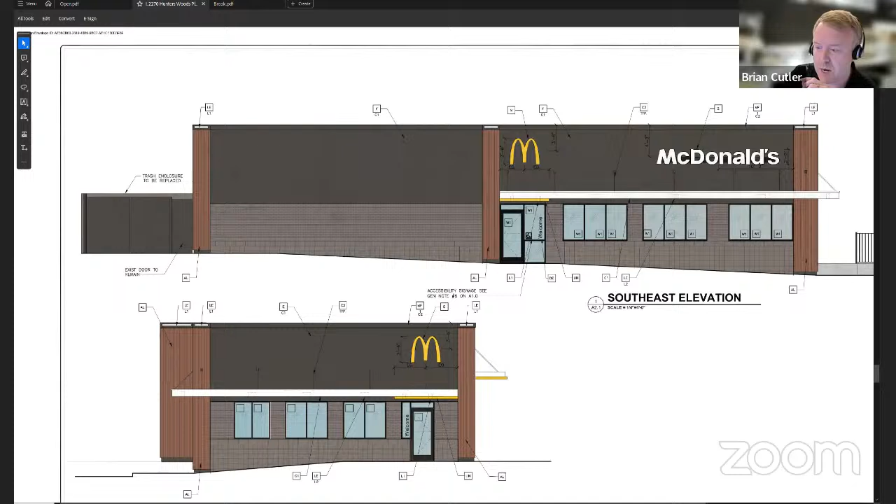I did want to ask, so you've got the manufacturer, but you call it the wood grain. Do you know which one? It looks like there's a lot of wood grain options from this manufacturer. Do you know which one you'd be going with? It depends on what's available, we use so much of it. Sometimes it's smooth, sometimes it's got a texture to it, like a wood grain texture. But if there's a specific kind you need, we can order it and get that in.

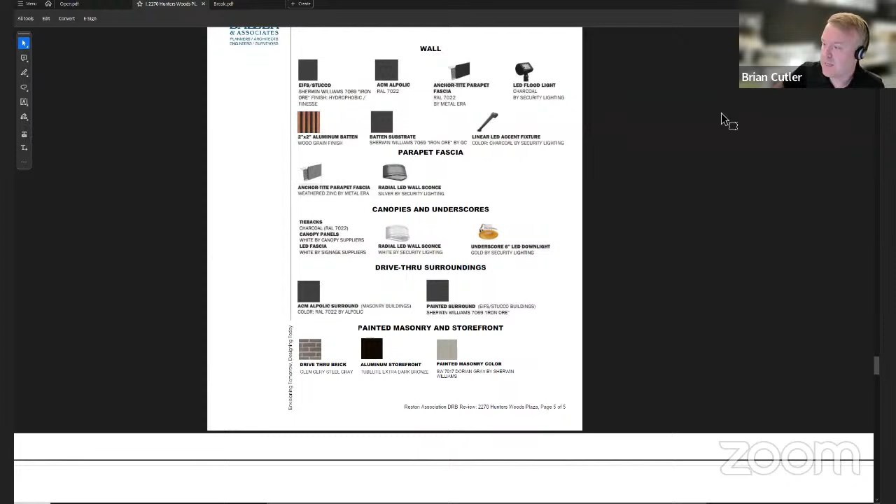Well, I don't know if there's a specific kind, of course that's up to you guys for what goes with the palette. I'm just looking at the options, and it ranges from really light maple to really red, really dark, which I would avoid of course. But I think that would be an important thing to clarify for the overall palette, because right now, and I know it's a rendered elevation so it may not be exactly accurate, it's reading kind of really dark reddish cherry wood in my opinion. I wonder if that could be lightened up to help as well.

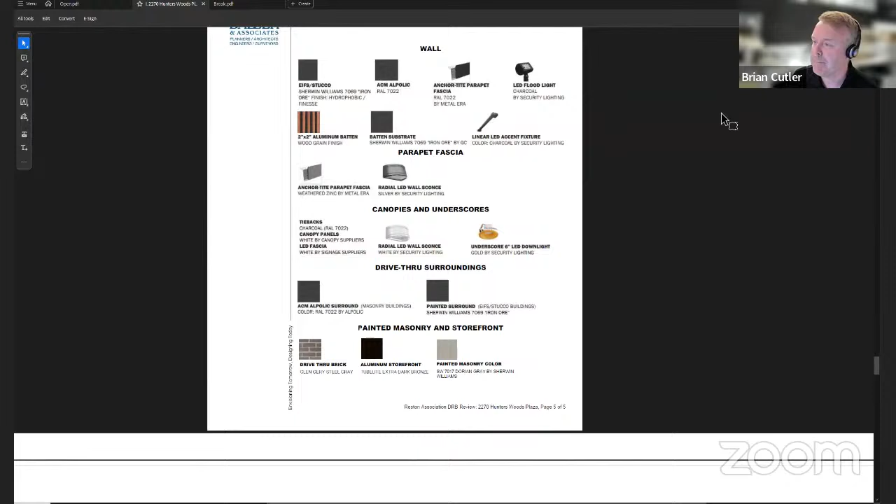Yeah, because the ones I'm looking at lean much more towards, let's call it, oak coloring versus the red, from what I see on some other stores with this option. But I definitely think it's close, I don't think we're against it. I think it's more of a, how do we maybe look at that front facade, or side, let's call it the southeast elevation, how you guys have it labeled. How do we dress that up just a little bit, where that big facade is? Maybe it's less dark paint, maybe it's more wood paneling.

Does anyone else have any thoughts on any of the signage, the lighting, the elevations? You guys are seeking final approval, I'm assuming?

Yeah. Even before we paint the whole building, is it possible to, if you guys want to come out and see swatches of it on the building before we do everything, and if we have to change it then? I love that idea. Yeah.

People will do a mock-up of what's going on, so we can see it, because this still doesn't show it properly. It looks pretty dark here, and McDonald's are usually not that dark.

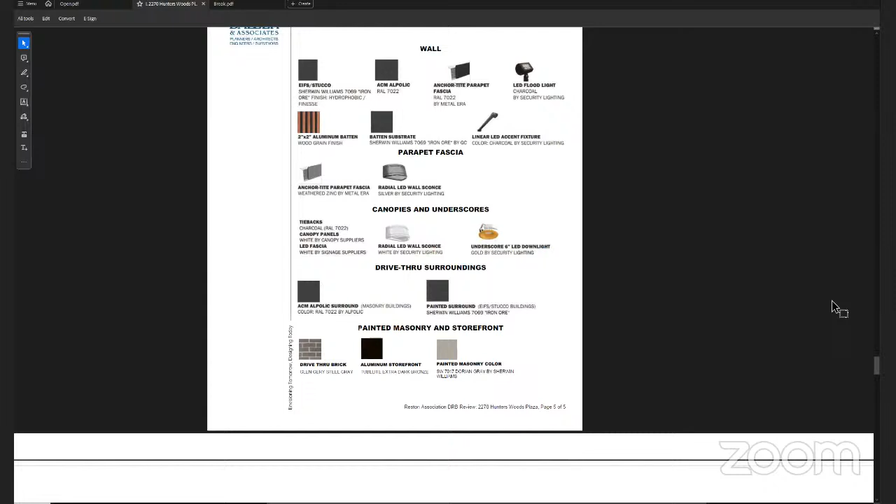The aluminum battens were lighter before, they've gone to this darker wood grain finish. But even if we do have a lighter paint that we use, we can get a sample of that too.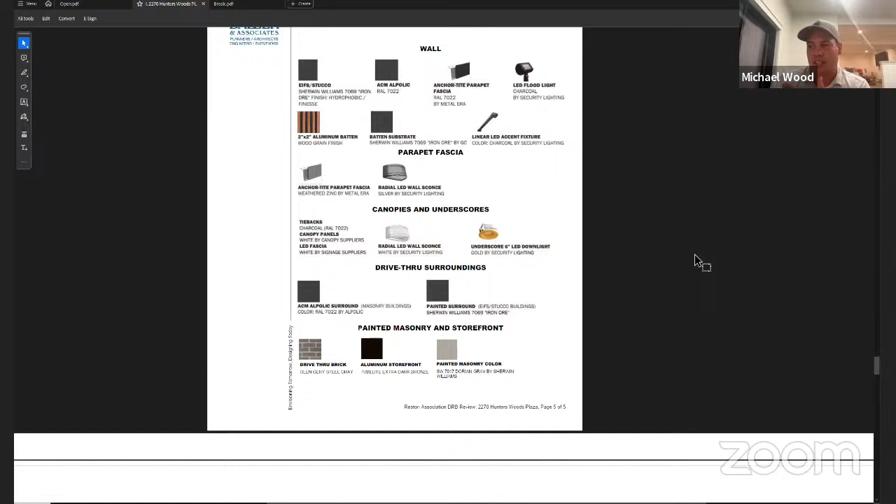I'm doing it on another building, but it's more towards the beach. It may be helpful to submit a real life picture of what it looks like. Yes, that would be very helpful, because I'm Googling quickly and using image search, and it's helping me see truly what this palette looks like. Obviously the rendering is just a computer drawing, whereas the actual in-person stuff looks much nicer. So I definitely think that could be helpful.

Elena, do you have a comment? Yeah, also I think it's a Rite Aid across the parking lot from this location that has started using some of those colors. I think it'd be really helpful to see the actual colors also at the site, at least for me.

Because we can't think of this in isolation. The rest of Hunters Woods, the rest of the shopping center has been evolving.

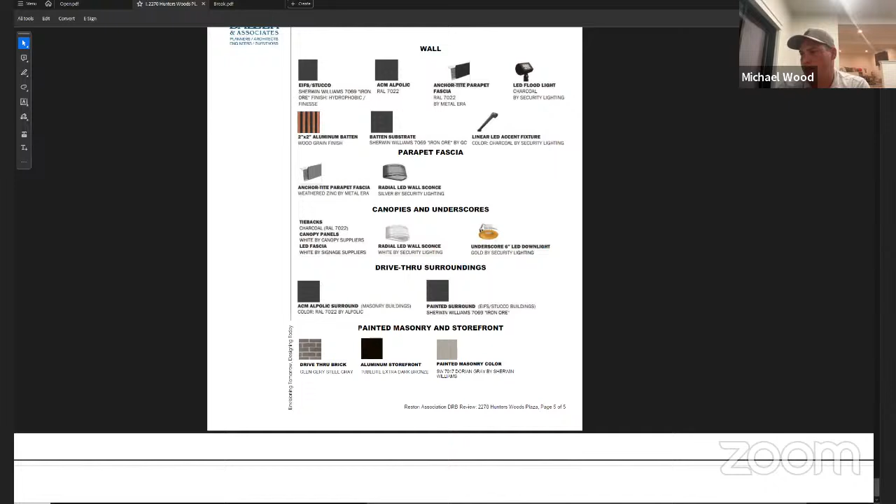I think it does have a little leeway as well, because it's an out parcel building. I'm just saying there is a little leeway also, they don't need to match, because that coloring does have a darker wood paneling that they put in.

And I would say that's almost maybe too dark. Well, I'm not a big fan of this redesign, but we want to somehow improve on it and not be a thorn. I think this is the nature of a mock-up versus a real life install versus what the rendering looked like, right? So just trying to prevent that again would be helpful.

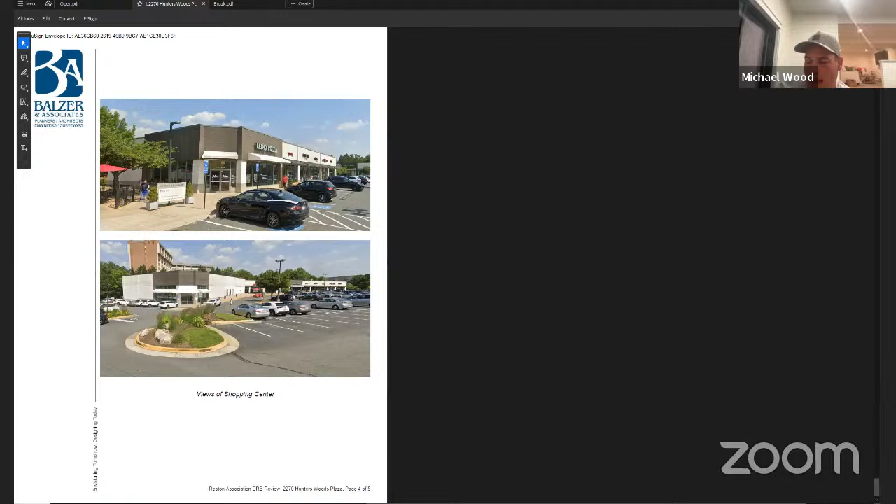So does anyone, I think the lighting makes sense. I don't think they're adding any additional lights that aren't warranted. I think the extra light at the drive-through potentially will help this trash enclosure issue. I think the biggest issue is probably just keeping sure that door is shut, which we can't enforce, but it's a very unfortunate location, obviously they put it where they could when they built this originally.

What we can do, if people are open to it and anyone has other comments, is kind of do a conceptual approval where we approve of the overall concept but request more information on the detailing, whether maybe you break up the faces into different joints.

Do you introduce a third material? Do you not paint some of it? I think there's definitely some ways we could break up a little bit of the monotonous look that's currently here, and also give us some real world examples of different installs. Luckily we have the luxury—you guys are doing a bunch of these, so there should be some real world examples you could provide us to give a better feeling for the color scheme.

Does anyone have any other comments or want to make a motion? All of McDonald's eyes are on this because they're going to come see it—this is one of the first Burger Kings we're converting into a McDonald's. So they're always asking on our national calls, 'How's Reston?'

Well, then that means we want to make it good. We want to make it look great. So, does anyone have any other comments?

Want to make a motion? I think you kind of just did. You want to reiterate it? Yeah, I'll retroactively use all that language now. I'm not going to do that to Patrick or LaShonda—they're going to hate me.

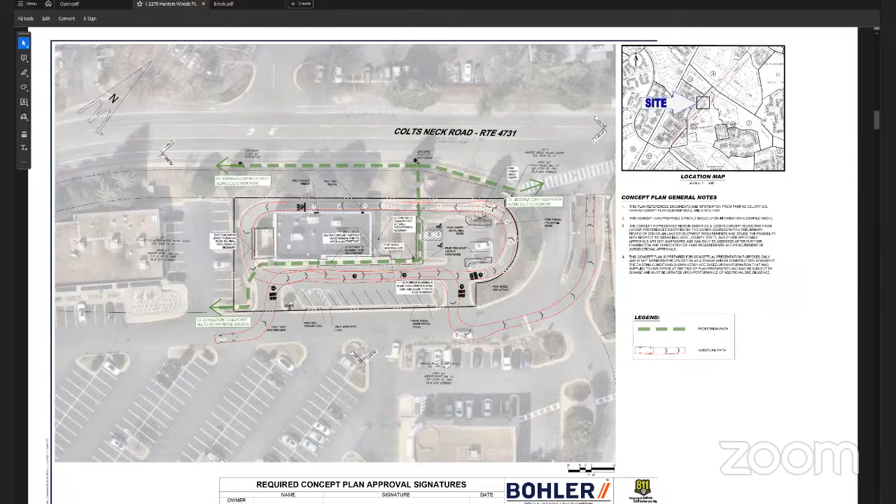That actually was going to be my next question—since we do have an agreement in place, are we able to submit for permitting? Obviously, yes, you can submit for permitting. That's great. You can't start work until you have our approval on the design perspective for the exterior, but interior work is not under our purview. So as long as you had a building permit even for the inside, you could actually start on that work.